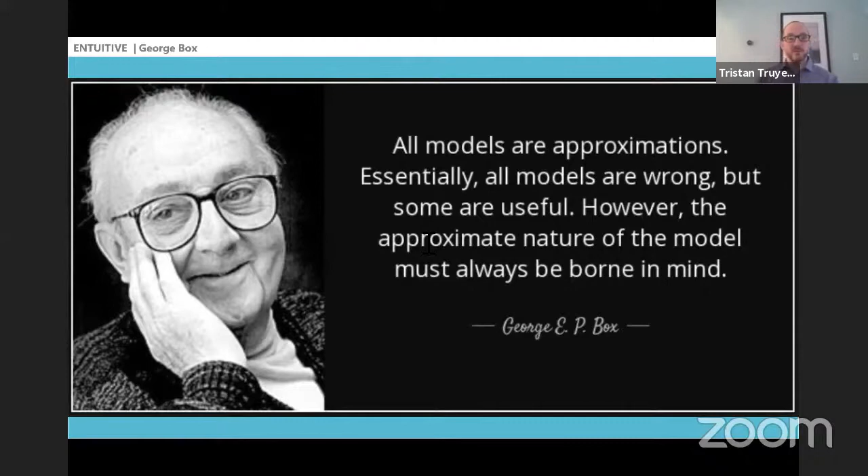So we all know that as a species, we're collectively facing some pretty serious challenges in the face of climate change. And further, those of us in the AEC industry, as it was established in the first 2 presentations, our challenge is nothing short of making every building we design net zero in less than a decade. This presents a pretty substantial problem, particularly because architecture, like yoga and the law, is a practice. And it might seem like semantics, but the words really matter here.

The design of buildings are frequently based on repeating and modifying past successes. But we don't really have a precedent for a typical, steak and potatoes, carbon neutral building that we really need to figure out how to design to address the climate crisis.

And so this is where those digital methods that we're all discussing can really come to the rescue by giving us that simulated sandbox to play in to test our ideas and short circuit history a bit in our development of new net zero precedents. So a few very practical perspectives on how we get there and can achieve our goals.

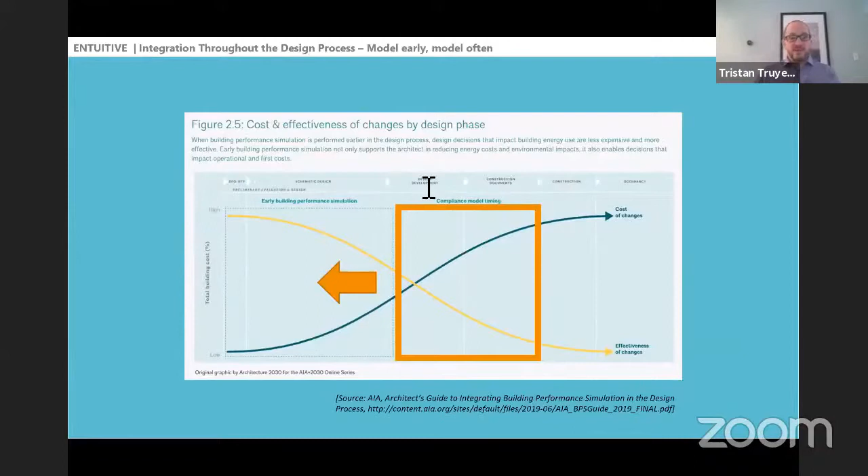So first off, we need to start asking questions about building performance really early, literally as early as possible in the design process. For those unfamiliar with the MacLeamy curves that are shown here, they're used to illustrate the inverse relationship between the potential impact and potential cost of design interventions as a project progresses.

So as you can imagine, on the very left, when things are in concept, you can turn a warehouse into a super tall with a few strokes of a marker on a whiteboard and essentially no cost. Whereas at the other end of the spectrum, once you're post-construction, having a deeply impactful retrofit of a building can be extraordinarily expensive and difficult to execute.

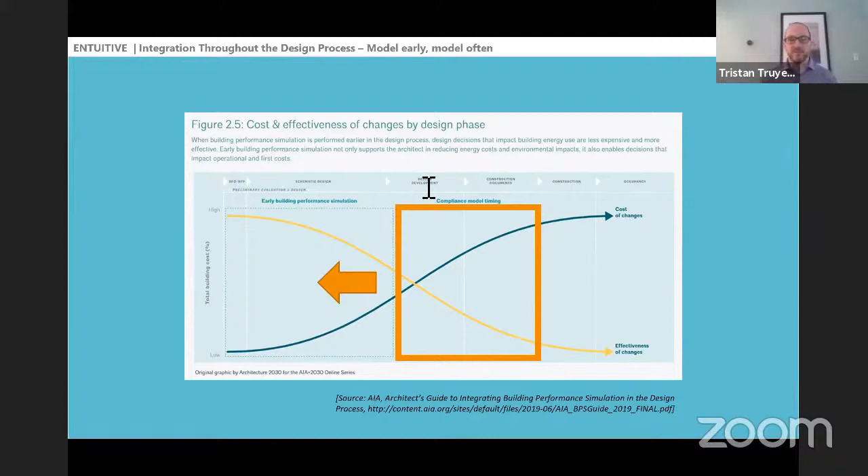Now, traditionally, the analysis of a design's energy consumption was held until towards the end of the design process, when it was felt that there was enough information that an accurate energy model could be prepared. But again, given that we know that those models are necessarily going to be wrong, striving for an accurate prediction of final energy has always been a bit of a fool's errand, and using it as the focus of all sort of modeling work has offered very little value to the design process. So we need to change that.

And one of the ways is really going back to basics when we're thinking about how a building interacts with its environment. I'm sure that many of you have seen some versions of this sustainable design pyramid before, but I really like how much it simplifies what we're trying to achieve here. In the earliest days of the green building movement, the pyramid was almost worked in reverse, with solar panels or a power purchase agreement being used to make an otherwise poor design be green.

Much more common have been attempts to engineer our way out of the problem or engineer our way to high performance by selecting top-end mechanical equipment and complex control systems to compensate for design elements like extensive balconies and floor-to-ceiling glazing. We really need to start thinking passively first, asking questions from a project's outset about how the envelope, massing, and orientation, opacity, the list goes on, of a building can be used as that first thrust towards low carbon performance.

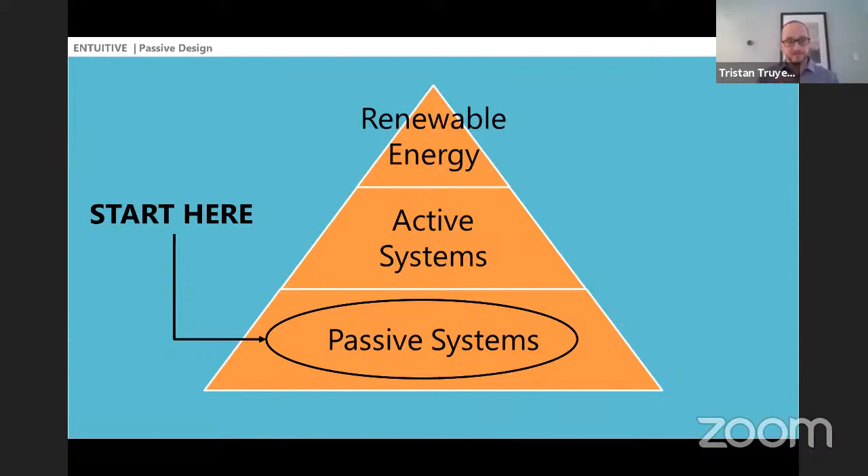Now, as Terry mentioned, doing so requires taking a look at the climate of where you're designing, microclimate data if you have it available, to evaluate things like total solar resource: how much heat can you get from the sun passively when you want it? And conversely to that, what periods of the year are we really going to be wanting to block unnecessary and harmful solar radiation? How many hours per year can we likely open the windows and allow ideal internal conditions through natural ventilation?

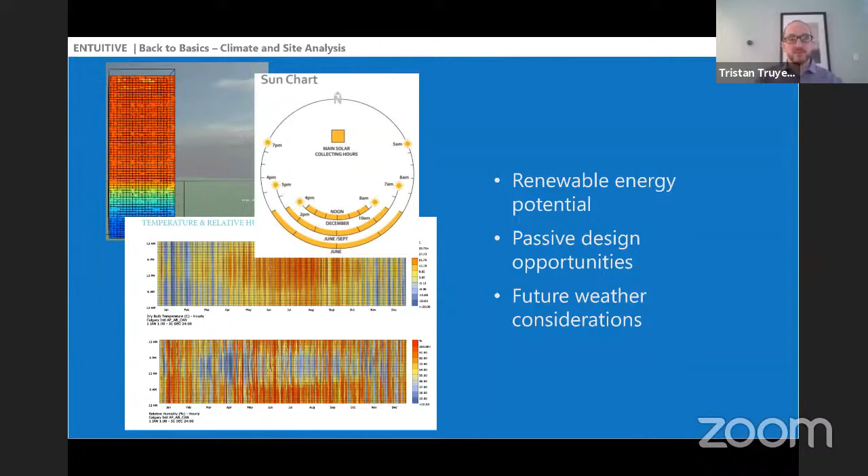We also need to keep our studies simple. As Brady pointed out, rapid and reliable is really where we need to be. And if you're building a fully developed energy model to answer every single question, you're definitely not going to be rapid. So we need to sort of divorce ourselves from the idea that a fully developed model is what is needed

to answer questions. Setting up simulations to answer a single question allows them to be developed and executed very rapidly, which provides teams with the design feedback that they need in a more timely manner.

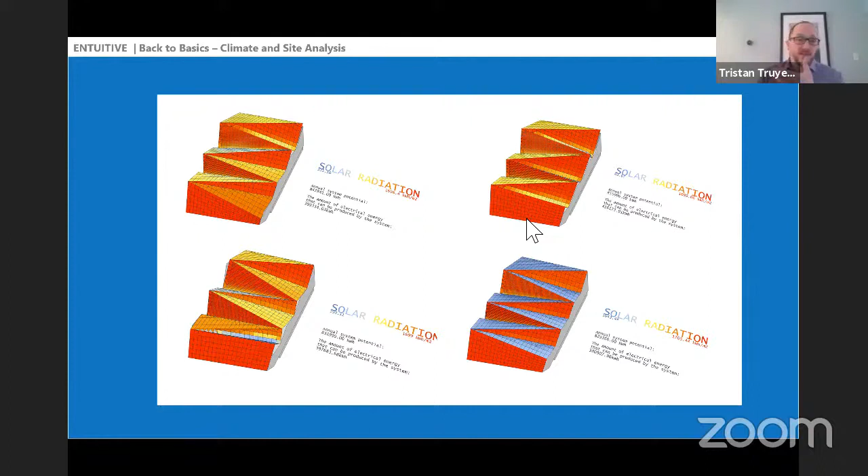The images on the slide here are tests that we did, actually tests that Patrick did, of slopes of roof surfaces that were destined to host solar panels to ensure that they were optimized to the solar angle, as well as still giving the architectural expression that the client was after. Same story could be said about simulating for depth of overhang and what it can do to the cooling requirements of a space.

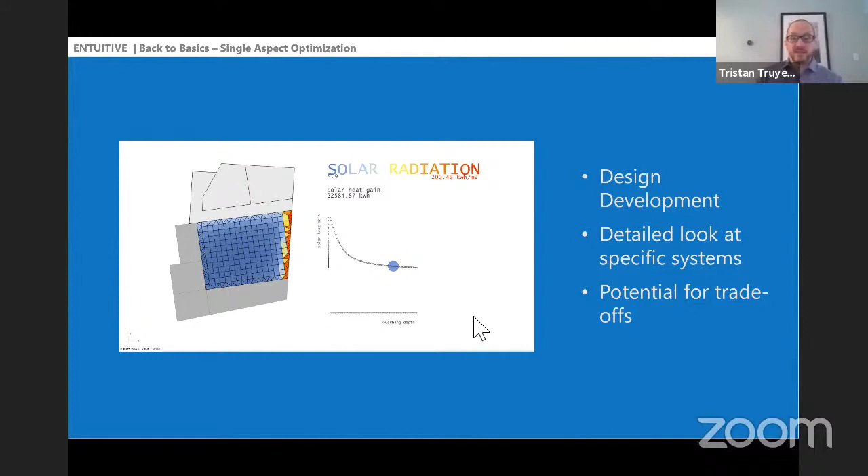And similarly, there's a wealth of data that can be extracted from very simple box representations of a single floor or single thermal zone, which again allows for very rapid exploration of high-level design choices.

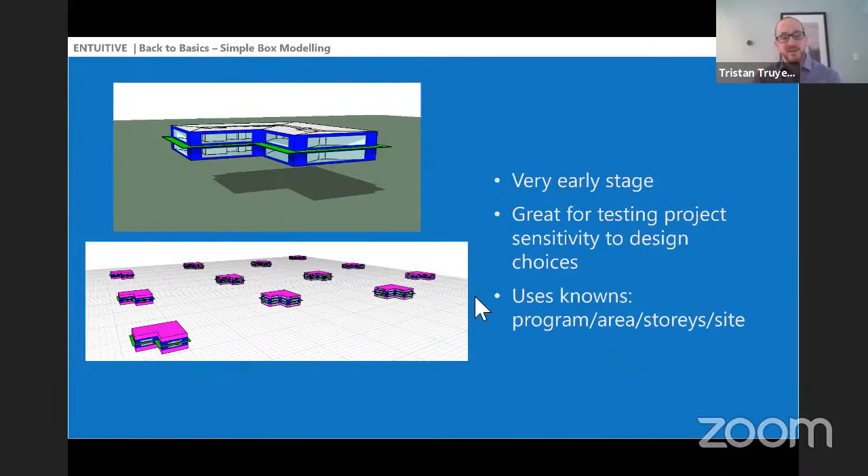Also, just to make a callback to, I think it was Terry's presentation, it's really important that we all find creative ways to represent this extraordinary volume of data that is starting to be produced by digital design tools so that it can be communicated effectively with the project team.

Parallel coordinate representation has become a bit de rigueur lately, but there's plenty of other methods to make sure that we are parsing these large volumes of data so that project teams can understand them and make their design decisions appropriately. After all, we're not just doing this analysis to show off how smart we all are.

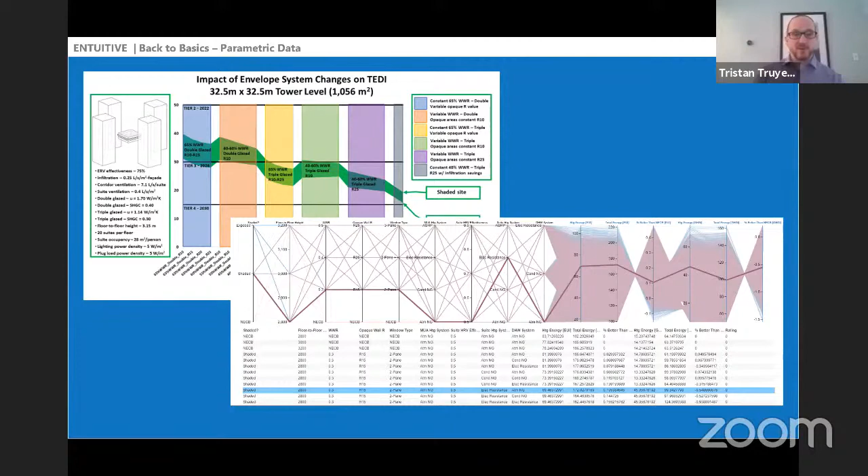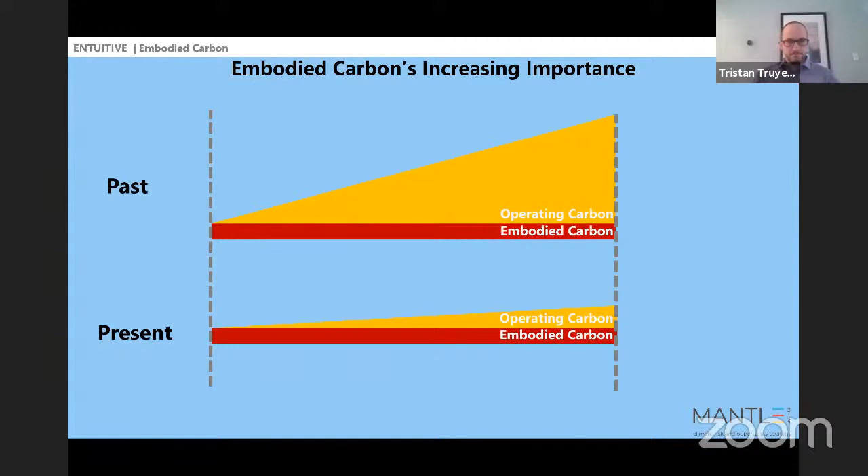But as we push towards net zero operating carbon, the red block becomes a much more significant portion of the total emissions associated with the project. When we look at our near-term and most aggressive goals in terms of needing to course correct by 2030, it becomes clear that the embodied carbon impacts are crucial to being addressed.

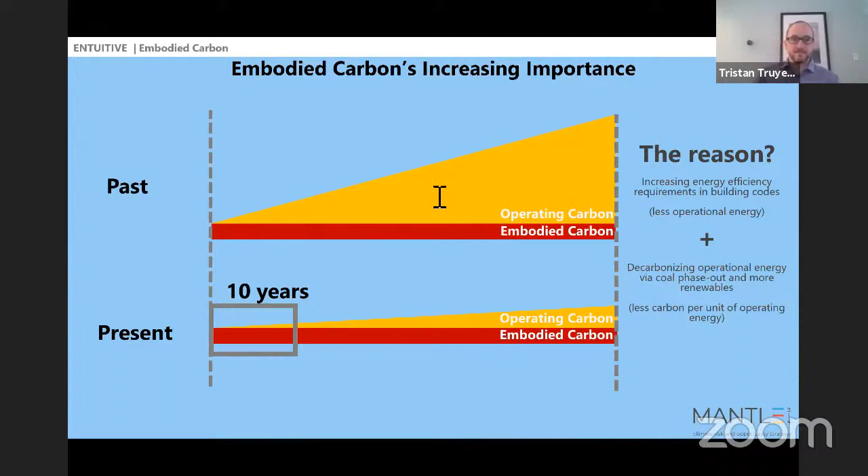Addressing embodied carbon requires looking primarily at the building's structural systems, which again complicates matters further, as this is definitely an area of design that is historically averse to being wrong, no matter how useful. You know, structural engineers like to know for sure that the building is going to stand up and hold its form and not deflect over time.

So there's some good tools that are starting to bubble up to help designers grapple with these problems. One Click LCA, Tally, EC3 have all really started to show some real value and get some real uptake in the marketplace.

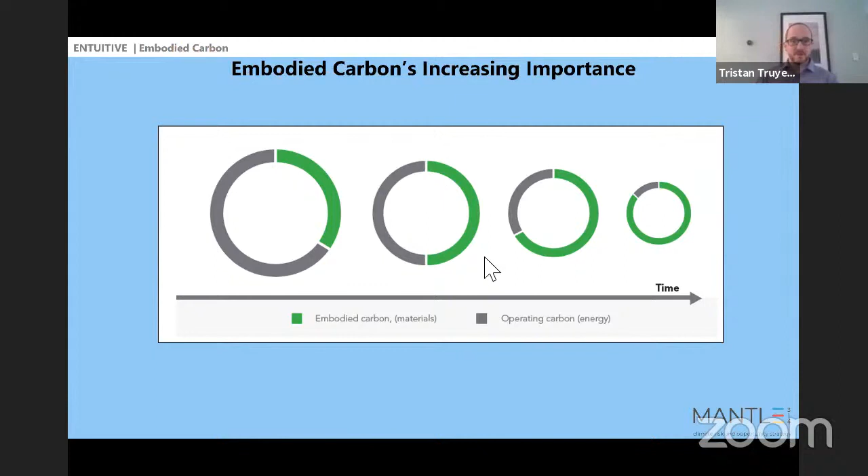We've also been working on a simple tool internally here at Entuitive that can help us answer these questions for design teams as early as possible, breaking down a design concept into its simplest forms and applying bulk calculations so that we can get a reasonable order of magnitude of the volumes of structural and building envelope materials that will be

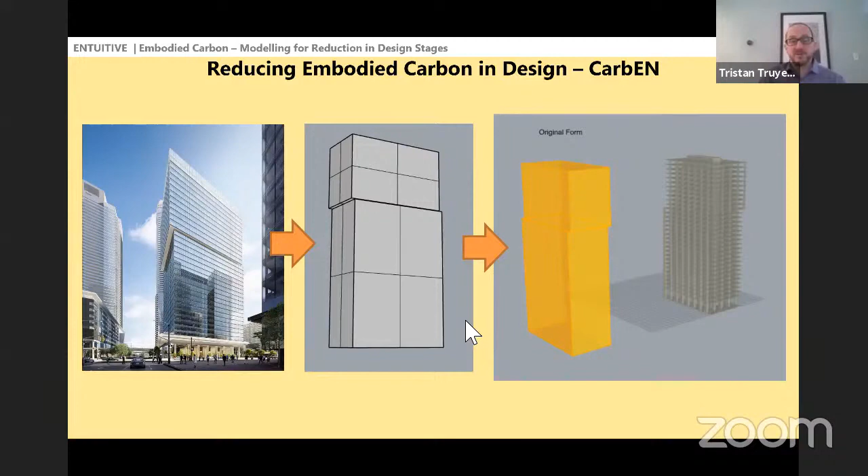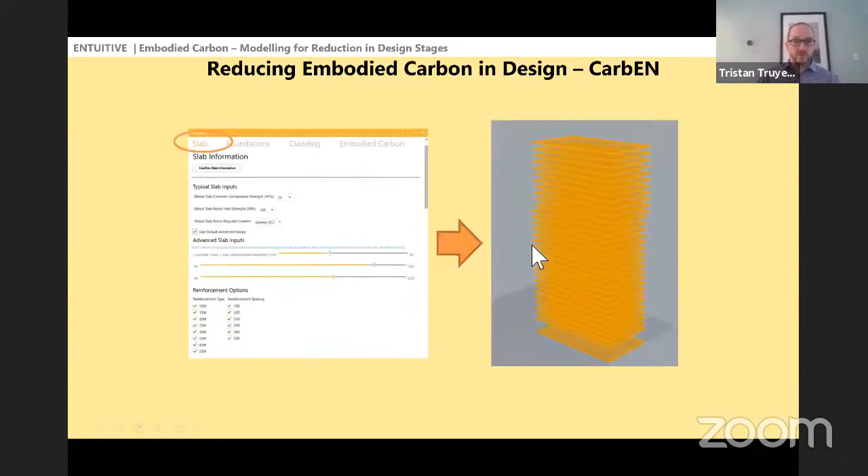required for a design. It does so by taking some inputs and answering some conceptual questions about the columns, cores, slabs, and cladding of a building, and then uses those details to compute which subsystems within a building have the highest embodied carbon, which really gives design teams the information they need to take a targeted approach to its reduction.

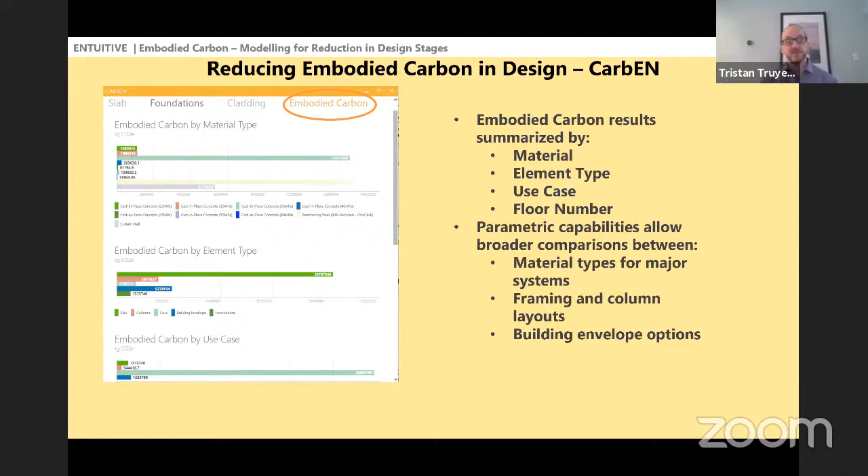So it's a bit of a whirlwind tour, but I'm really hoping that some of that was informative, and I'm really looking forward to the questions and discussion that's going to come up with the panel.